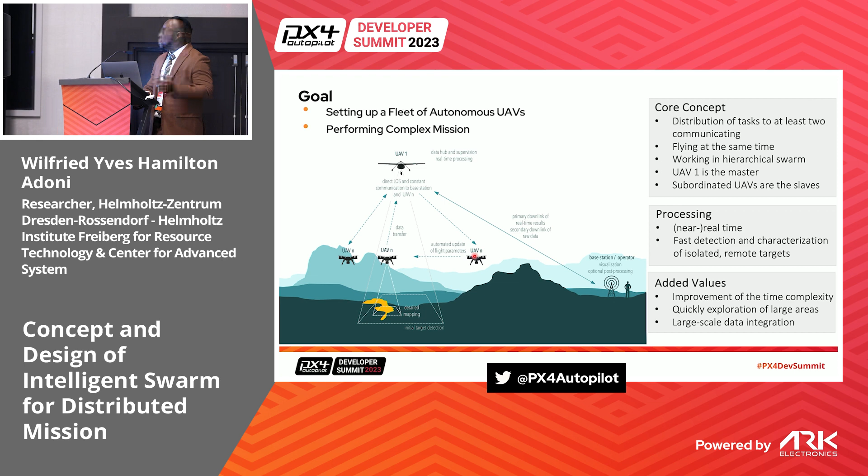So this is a simple example that highlights the impact of the swarming concept. We make that here. An example of the survey mission that we will use to survey an area of 1 kilometer square for hyperspectral imaging processing. By using the conventional approach with a single swarm of drones, we achieved this mission in 2 days.

And don't forget that every time we have to make some little downtime to change and recharge the drone batteries. So in this case, we can say that this approach is not very good, because it takes more time, and the computation is made sequentially until we cover the whole area.

So when we use the swarming concept, and we use a fleet of worker drones which work together to achieve a common mission, we achieve this mission in 2 hours. So from 2 days, we switch to 2 hours. And the drones fly simultaneously, and we can acquire lots of data sets in real time. So this approach is very interesting, because by using this concept, we can explore some big area in record time.

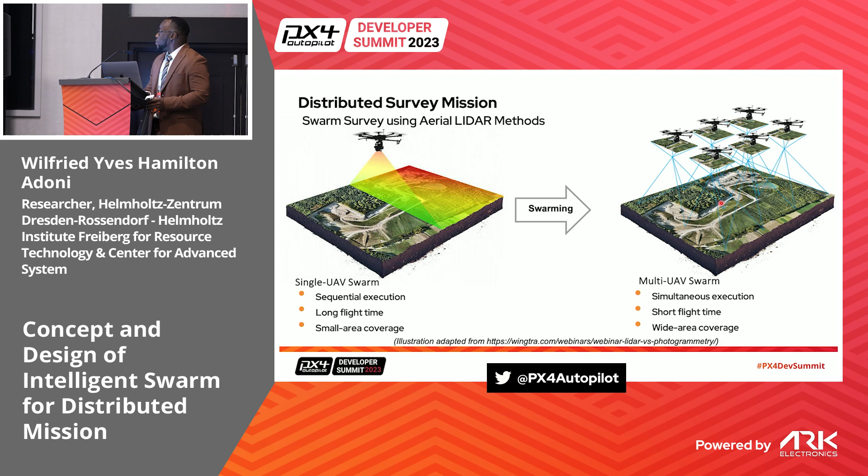But we have a lot of challenges and constraints that we have to face when we work on the concept of autonomous swarming. The first one is about the technical barrier. Don't forget that the drones we have currently have limited flight time, because the battery life cycle is too short, and every time we have to change and recharge the battery. This affects the timing. Another one is about the interoperability.

Since in the swarm we can have different kinds of drones with different kinds of communication protocols, the question is how to create a mesh communication protocol, and let the drones communicate if they have different communication protocols.

And we have also the problem of mobility. In the swarm, sometimes when one drone moves too far away from another one, we can lose the communication. So we have to maintain a certain distance that prevents the network instability.

And another challenge is about the embedded intelligence. By intelligence, we talk about how the drone reacts, how the drone collaborates, and how the drone coordinates some jobs or tasks with another drone to achieve the common mission.

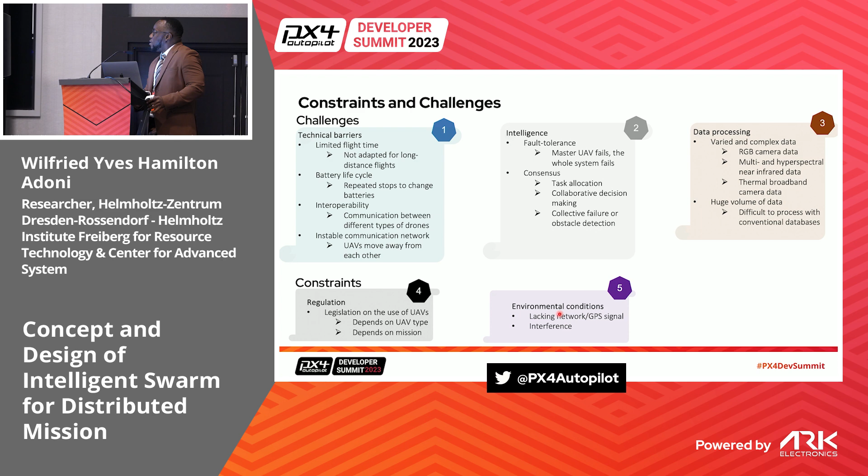And we have another constraint related to the weather and the environment conditions, which can affect the network stability and the GPS signal.

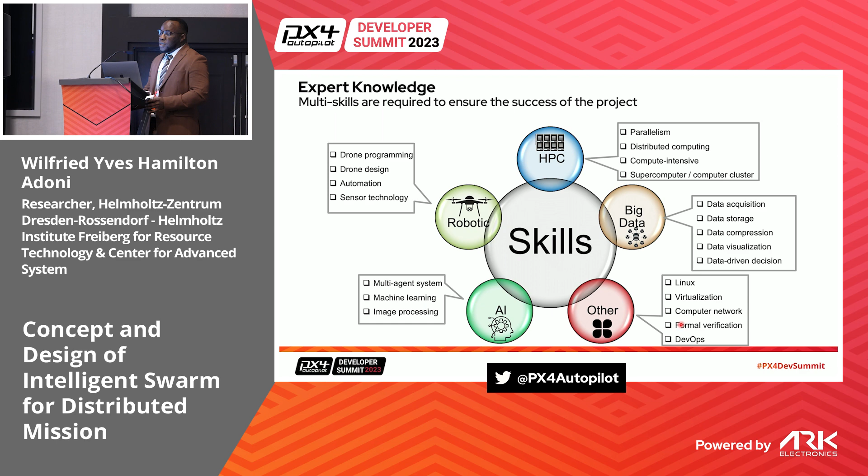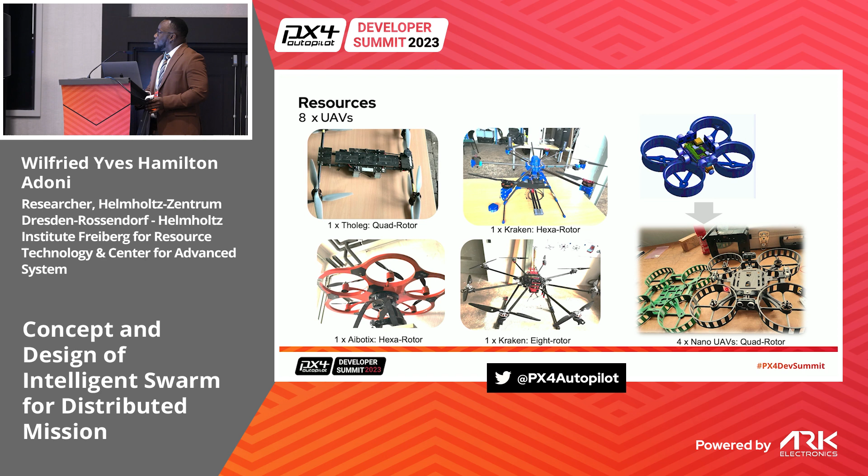So, with our research institute, we have 8 drones, and most of them are multi-rotor. For the moment, I perform some tests with the nano drones. It's 4 drones. I use one as a master, and the other 3 serve as workers. And when I'm sure about the test, I'll deploy this on the big drones.

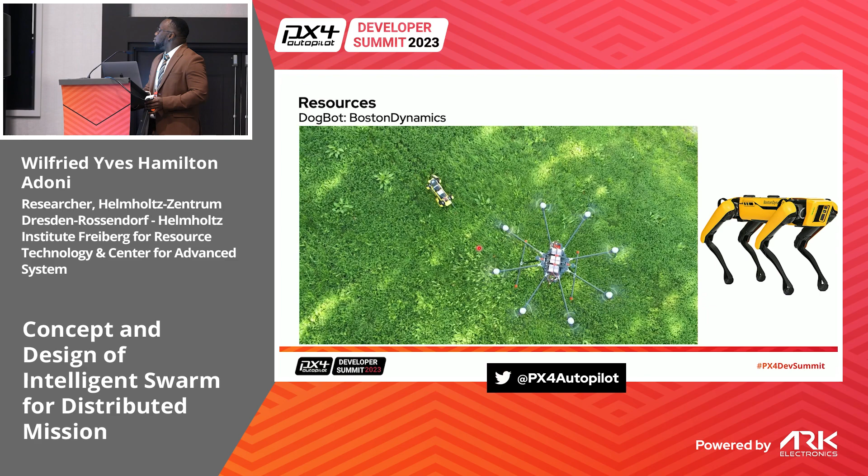And we also want to build a coordinated ground-to-air program, which will allow us to have full coordination from the ground to the air between a given drone. So we plan to add the dogbot inside our swarm to perform some other collaborations. And this is one example of our last implementation.

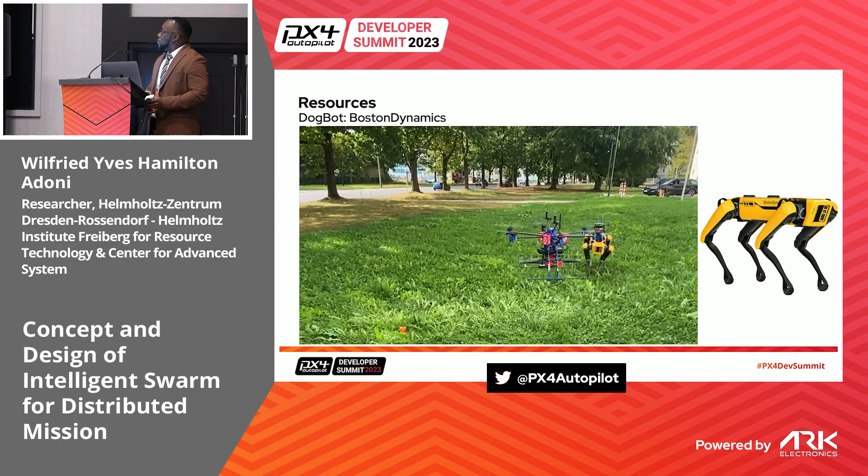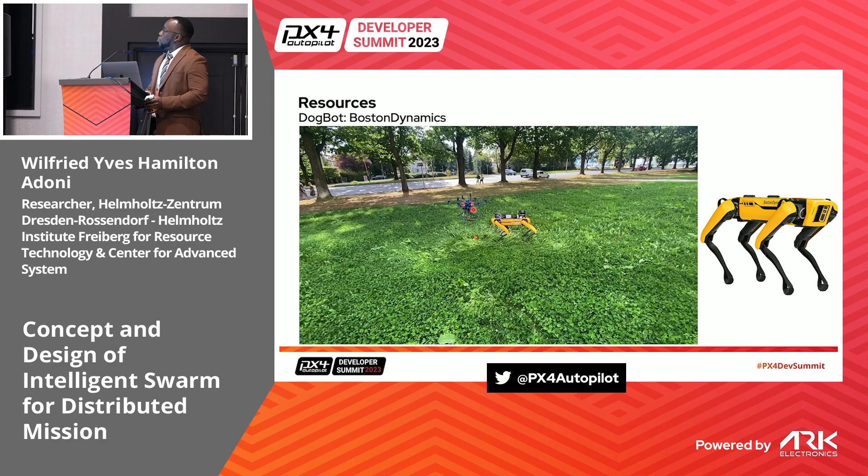First, the big drone will fly at a given altitude. It will search for a target, and it will send this position to the dogbot, and the dogbot will move to this target. It will identify the target, and from the identification, it will tell the drones, okay, now I have some information about the target. Come here, pick up the target and move to another position.

So this is another project that we plan to work on, and we will integrate the dogbot in the swarm. There is not a big difference, except that for the dogbot we don't have to consider the Z position, because for the drone it's about X, Y, Z, and for the dogbot it will be just X and Y.

For the software tools, we opt most of the time for open tools. We use ROS as a programming framework, and we use the standard MAVLink protocols. And here we use Ubuntu 20.04 for the implementation of the program, and the Raspberry Pi is the operating system of our drone.

And before deploying on the real drone, we perform some simulation. For that, we use Gazebo 11 with RViz to have some information about the perception of each drone. And sometimes we use MAVProxy, which is a light version of a ground station.

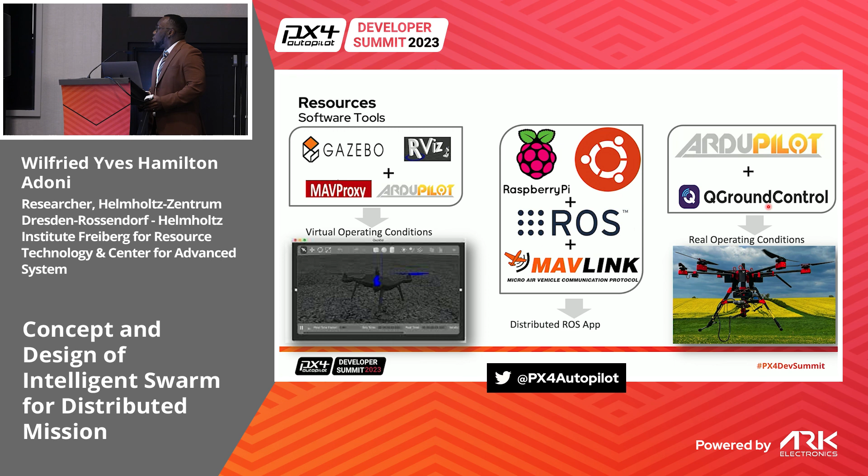So, okay, before we go to the conception, it's very important to understand some information about the communication architecture and the communication protocol, because it's very different from the classical drone concept that we use. The first thing we need to understand about the swarming concept is that we have a set of drones which work together to achieve a certain mission, and we have some interaction.

The first one in the architecture is that we have a fleet of drones. It could be autonomous or not autonomous. So when is it an autonomous drone? It's about the drone that does not need human assistance. For not autonomous, it's about the drone that is remotely controlled by a human from the ground. And the set of drones will form the multi-UAV, also called a swarm.

And we have the environment. So in the swarming concept, the definition of the environment is very important because each drone, based on the local environment that it has, will perform some action in this local environment. And we have perception. The perception is about the information that the drone will collect from the embedded sensors that we have.

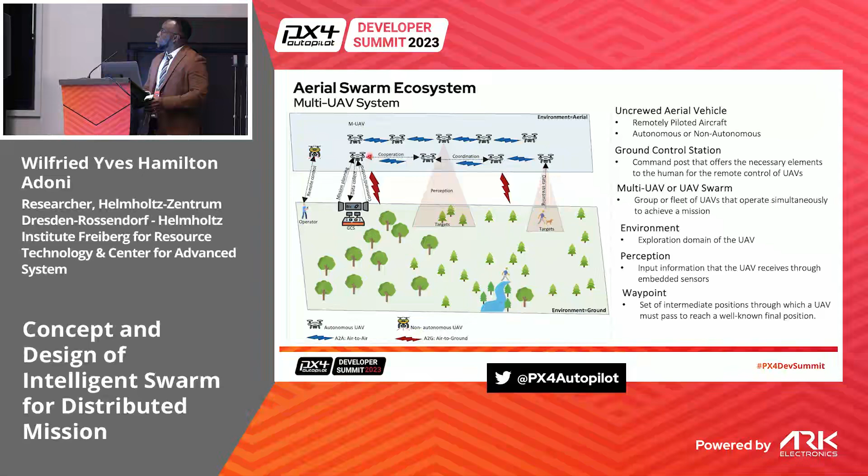And we have different types of drones, and this is also important because the kind of drone that we have in the swarm will determine if it is a homogeneous swarm or a heterogeneous swarm. A homogeneous swarm is when all drones in the swarm have the same configuration. A heterogeneous swarm is when in the swarm we have different kinds of drones.

So we have four kinds of drones. The first one is the helicopter drone. It contains a single rotor. This kind of drone has limited mobility because it just has a single rotor. But it has other advantages, like the flight time, and it can hold the same position for a certain time. We have the multi-rotor, which is an improved version of the single rotor, except that this drone has a limited flight time because of the battery life cycle.

We have the fixed wing. It is another version of drone that uses a fixed wing attached to the structure of the drone, and it flies for a long time and has a high velocity. But the problem is that it cannot hold the same position for a long time. The last one is the hybrid drone. It takes advantage of the multi-rotor and the fixed wing to face some challenges, some problems that we have here.

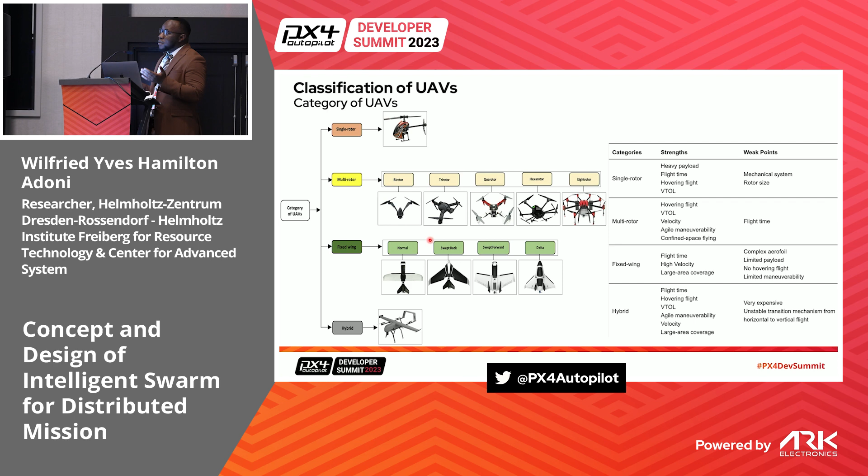So when we build a swarm, it's very important to understand what kind of drone we have, because it will really affect the mobility of the swarm. It sometimes affects the mission planning, because if we have one drone with a limited flight time and another one with a long flight time, we have to be careful about the workload of the drones.

For the communication architecture, we have different kinds of communication architecture. Here I have made a classification. The first one is a centralized communication architecture, and we have a decentralized communication architecture. From the decentralized one, we have a single-group architecture, and another one, the multi-group, which is an extended version of the single group. And don't forget that the communication architecture of drones belongs to a flying ad hoc network, dedicated to mobile objects, which belongs to a MANET.

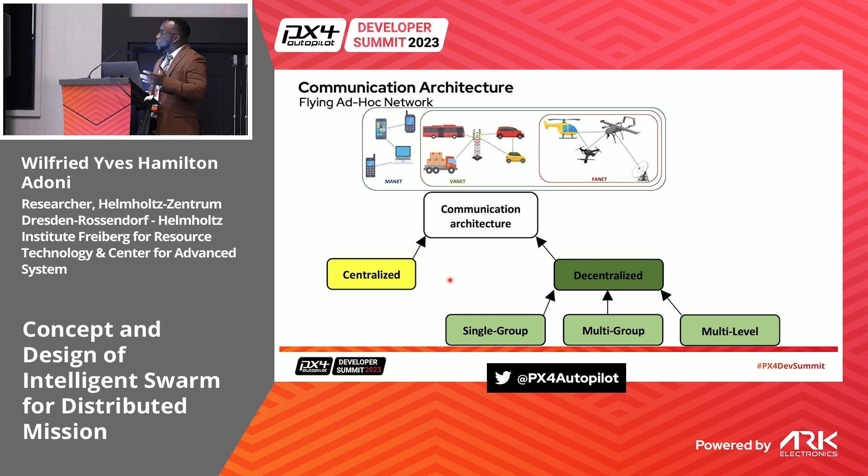So if we want to build a whole autonomous system which embeds all kinds of vehicles, it's very important to understand the communication protocol that we have between the FANET and the MANET. And if we want to switch from the aerial vehicle to the mobile vehicle, we have to cross the protocol to allow easy communication. So I will now explain the different kinds of communication architecture, because with this communication architecture we will implement the kind of mission that we have.

The first one is the centralized communication architecture. With the centralized communication architecture, all drones communicate directly with the QGroundControl station, and we don't have direct communication from drone to drone. All communication between two drones must pass through QGroundControl. This is another problem, because if we are connected to the QGroundControl station, we are not allowed to move too far from it, because we lose the communication. So in this case, we can see that this kind of architecture has some weak points. The first one is about the coverage space.

We use this sometimes to cover a limited environment because we are not allowed to go too far from the ground control station, because we will lose the communication. Another problem is interoperability. For this, all drones in this kind of architecture must have the same protocol to enable communications. And another one is the single point of failure. If the QGroundControl is down, we will lose the communication with the whole system.

This is why we switch here to the decentralized version. The decentralized version is an extension of the centralized communication form. We have to remove the QGroundControl dependencies. With the decentralized version, the first one is the single group. In single group communications, we have three kinds of actors. The first one is the QGround. We have another drone called the gateway drone. And we have the rest of the drones in the swarm. All communication between QGroundControl and the rest of the swarm passes through the gateway drone. It will relay the information from the QGround and dispatch it to the rest of the drones.

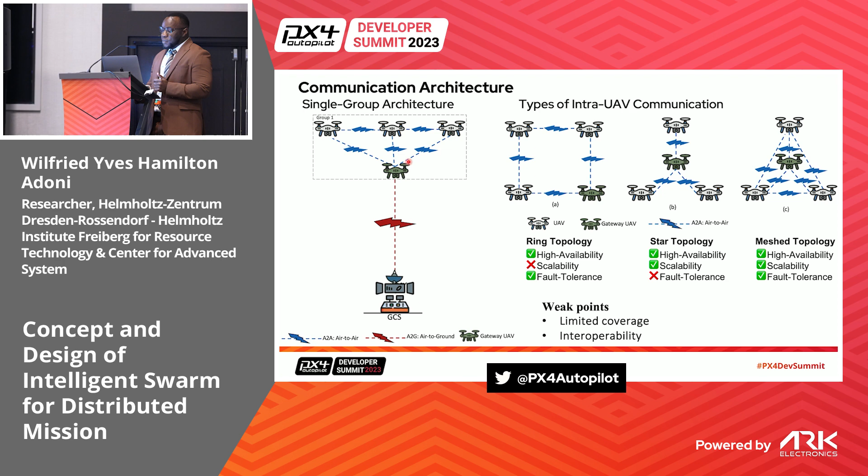The last one, the best I think, is the mesh topology. It takes advantage of the two proposals: it combines availability, addresses fault tolerance, and allows adding any drone to the swarm easily. But it has some weak points: with this communication architecture, we cannot move too far from another drone because we will lose the communication. This is why this architecture is used for limited coverage. We also have a problem of interoperability. All drones inside the swarm must share the same protocols.

Another communication protocol is an extended version from single group to multi-group. It's a little bit different. We build a set of different groups, and in each group we have a gateway that will relay information between all the drones in the same group. Communication between two different groups of drones passes through the ground control station. It presents a single point of failure in the ground control station first, because if the ground control station is off, we will lose all communication with the swarm. And if one gateway in a given group is off, we will lose the communication inside that group.

The last one is the multi-level architecture. It is, for the moment, the best communication architecture that we have for swarming. With this architecture, we don't have a single point of failure, and we can use different kinds of drones to perform the swarming concept. It consists of three layers. The first layer involves communication between drones. The second involves communication between groups of drones. And the last involves communication between the group of drones and the ground control station. For this, we use the group of drones that is very close to the ground control station, which will replicate the communication to another one.

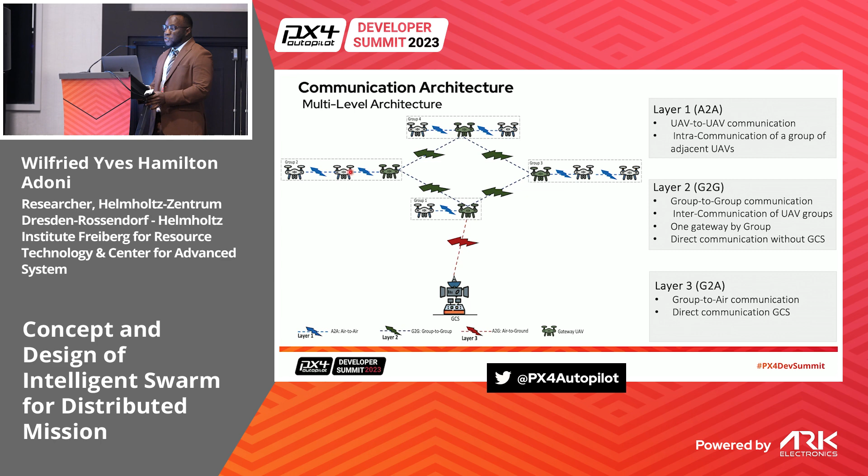So now we will start with the concept and design. I will show you the concept and design of the swarming that we have been performing with my research institute. First of all, the proposed concept is based on different kinds of methodology for the communication. To address the problem of communication, we use a decentralized communication architecture. And so, why? Because it allows us to eliminate the dependencies from the ground control station.

And we want to build fully autonomous drones, a fully autonomous swarm that will perform some actions without human assistance. And why did we opt for the decentralized architecture? Because with this approach, we can extend to different kinds of communication architecture depending on the kind of mission and the purpose that we want to have. And for the self-organization of the swarm, we opt for the leader-follower pattern.

The leader-follower pattern means that in the swarm, we have one drone that will serve as the master, and the drones in the rest of the swarm will serve as workers. The master drone is the main coordinator. It coordinates the actions in the swarm, it sends the mission, and sometimes it receives information about the progress of the mission inside the swarm. While the worker will work as a pure worker that will execute the tasks received from the master.

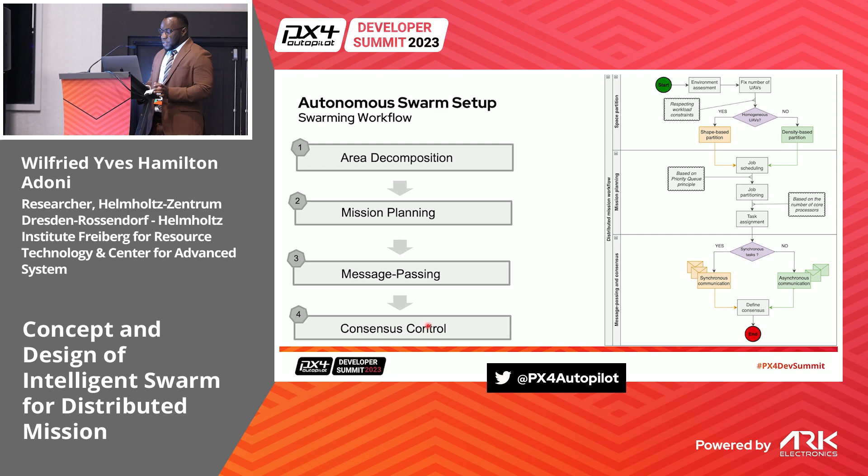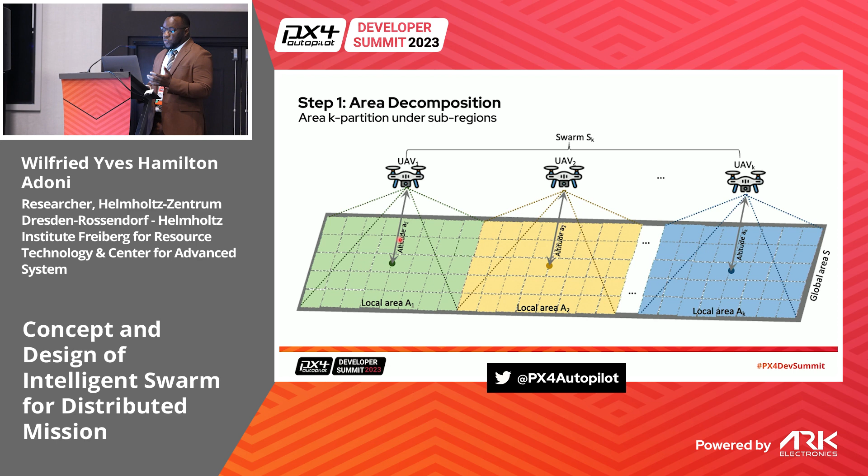The area partitioning is about splitting the area into sub-areas, and we assign each sub-region to one drone. And we have to create a boundary to avoid collisions, because we have to collaborate on coordination when we move to the boundary of the sub-region. And don't forget also that sometimes it depends on the altitude that we have in the swarm. If the drone has a high altitude, sometimes it affects the partitioning, or sometimes it affects the area of each sub-region.

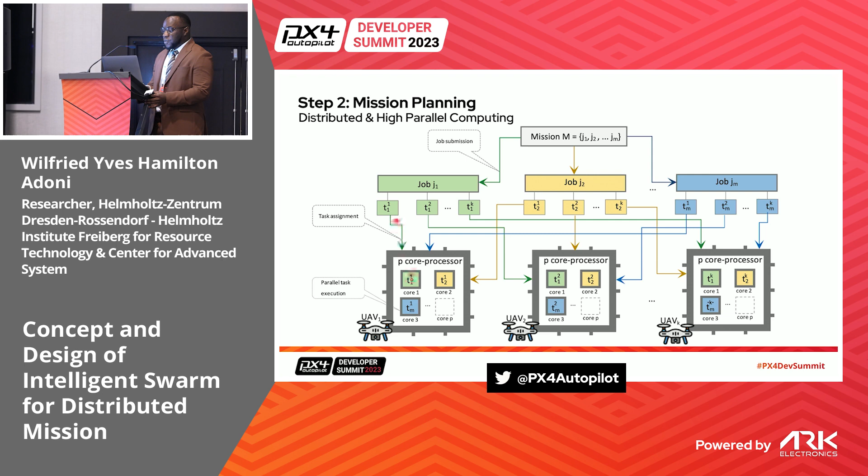The second step is about the distribution of the tasks. We consider that a mission is a set of jobs, and we take the job, we split the job into tasks, and we allocate each processor in each drone to compute the tasks that it receives. In this manner, it allows us to reduce the time complexity of the mission by the number of drones that we have. And to perform this action, we want to be sure that we have some available core processors. In our case, we use one core processor for one task that will be executed by one drone.

And concerning the message passing, we have two kinds of message passing pattern. The first one is about the synchronous communication message pattern, and the second one is for asynchronous communications. So it depends on the kind of mission that we have. If your mission involves real-time reaction between the drones, we opt for synchronous communications. Or if it is a mission where we don't have real-time interaction between the drones, or sometimes we have to wait until another drone achieves its task before going away, we will opt for the asynchronous time delay.

With the synchronous communications, all drones must publish and subscribe to the topics and services at the same time. While for the asynchronous time delay, we split the communication time into different rounds. And in each round, only one drone is allowed to publish and subscribe to a given topic or service. And we repeat the same process until we reach all the drones.

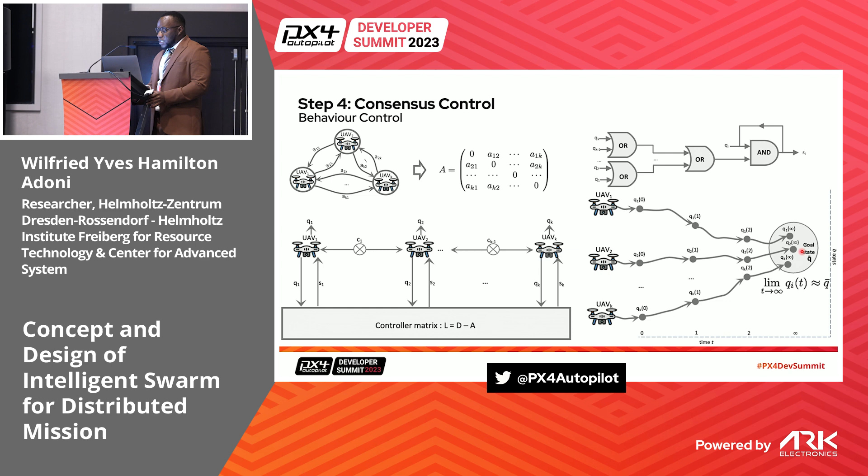So now for the proposed architecture, we have here a multi-layer architecture, and we can extend this by adding other layers. For the moment, it is a two-layer architecture. The first one is based on ArduPilot, and in this architecture we have two different sub-layers. The first layer is for the logical implementations. It contains some services and commands that we need to embed swarm programs. And before performing tests on real drones, we have a sub-layer that we use for the simulation.

And the second layer is the distributed computation layer. This layer is used especially to compute the distributed mission inside the swarm. It's based on ROS, and the communication architecture is a single group communication architecture. We have here the whole drones connected to a single leader drone that will serve as a gateway which will relay information between the application layer and the distributed computations.

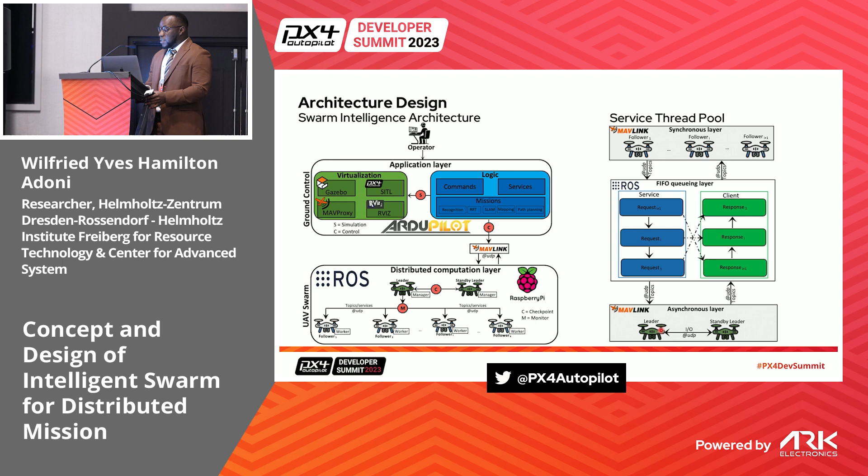The communication service between the follower drones is performed in synchronous manner, so that we have real-time interaction and can share resources or coordinate actions in real time. While for the leader drones, it is done in asynchronous manner, because we don't need to communicate every time with the standby leader. The standby leader receives information on demand of the leaders, if he asks it to send some information about its health status, etc.

So now, how do we control the swarm consensus? To control the swarm consensus, we use three kinds of daemons. The first daemon is the swarm manager. It is located on the leader, and it consists of two components.

The first one is the mission planner component, and its role is just to plan the distributed mission. By planning the distributed mission, it means that it shares the tasks to different ROS cores inside the follower drones. And we have the mission manager component.

This is used to perform tracking tasks about the advancement of the missions, and is also used to receive information about the health status of the worker drones. At the same time, it performs checkpoints about the advancement of the mission and the status of the main drones, and sends this information to the standby leaders.

We have a drone manager daemon. This daemon is located on the follower drones, and it also consists of two components. The first one is the task manager, which is used to assign each task received from the master drone to the ROS core.

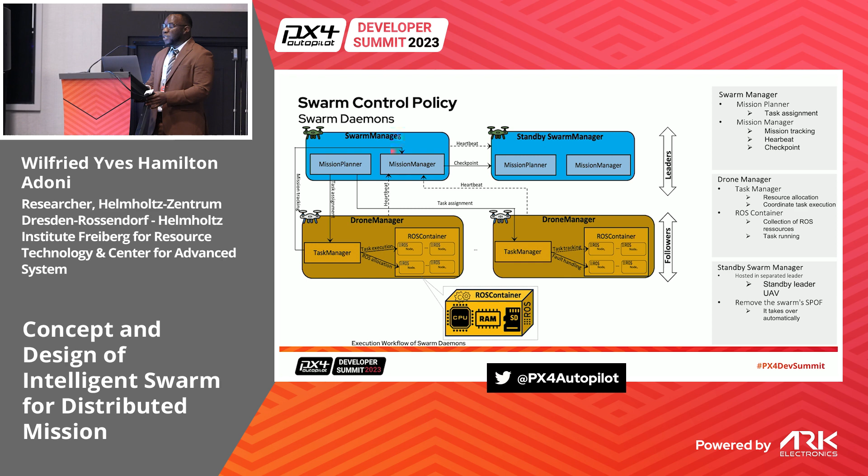So here is the communication process between the leader drone and the standby leader, how the two drones communicate to coordinate and to face the problem of fault tolerance. Fault tolerance means that if in the system the main drone is off, we must continue to perform the activities.

So for the first one, the leader drone will recurrently submit a heartbeat to the standby leader to notify that it is always working. It also submits a health status about the level of the batteries and other information that will be useful to determine if this drone could also use the main leader role.

At the same time, it performs a checkpoint. The checkpoint is very important for the continuity of the activity, because if this drone fails, the second drone will access the checkpoint file, and based on the information stored there, it will continue the activities without requiring information from the main drone.

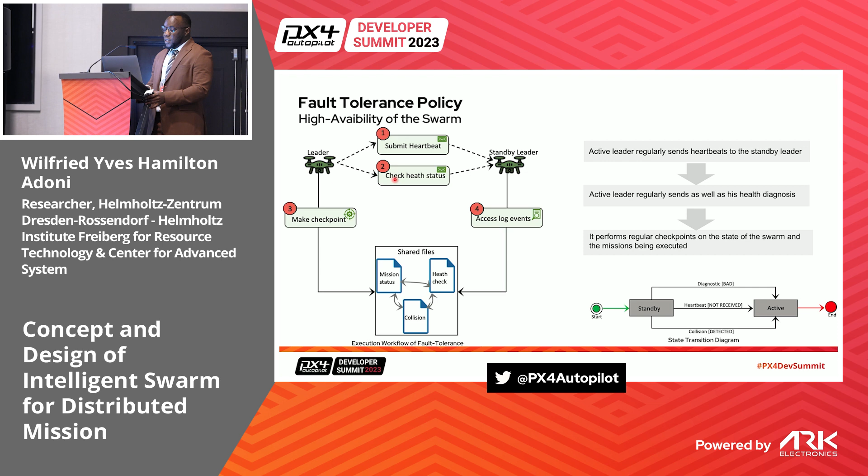So we switch from standby to active when the standby leader detects a bad diagnostic from the main leader, or sometimes when it does not receive a heartbeat from the main leader, or if we detect a collision from the leaders in the shared file. It will automatically pass from standby to active mode to achieve business continuity of the swarm mission.

Here is how we schedule jobs failed from a drone that breaks down. To perform this action, we use the FIFO and priority classifier. By FIFO, it means the first drone which fails will be the first drone whose task we will plan.

We have a priority order because, by the swarming concept, we have different kinds of jobs that we perform at the same time. So we have to give a different priority to each kind of drone. We have three kinds of priority.

The first one is the highest priority. It contains tasks that are very useful for swarm management. And we have a middle priority.

Sometimes middle priority is a job that is not necessary - we don't necessarily need it for the advancement of the missions. The last one is optional jobs, such as collision avoidance jobs, etc.

For the environment, we built a dedicated integrated environment that is used easily to implement a swarm project. The first one, we have the Gazebo directory.

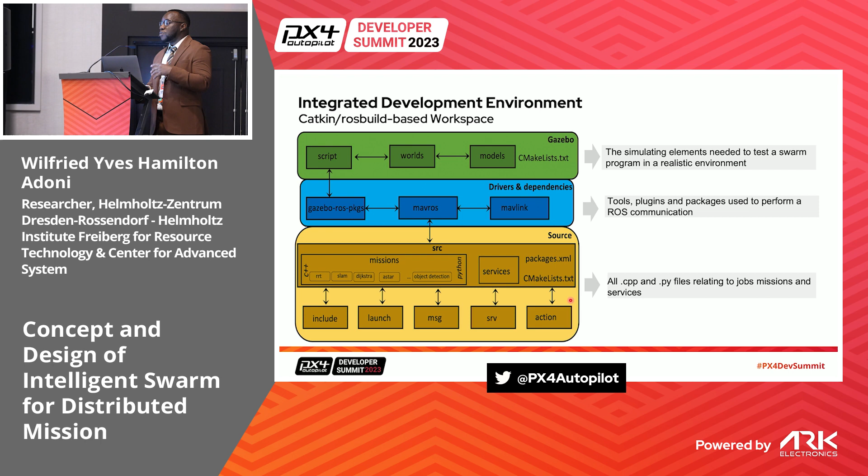This is very important because with the current workspace, it's very difficult every time to build a swarm concept. We have to go into various directories or files to rechange things, and it takes more time.

So now we'll go on to the experimental tests. For the moment, we have different kinds of tests.

We have a test for SLAM, and we have two kinds of SLAM: visual SLAM and SLAM with LiDAR. We also use this for the RRT algorithm to explore unknown environments using the concept of swarming.

We also use this for point cloud generation for large environments, and for multi-target detection. This means that based on a given area, we split the area into sub-regions, and one drone will work on its sub-area to detect different kinds of targets.

And we have a distributed coverage path planning algorithm, for which I will show some experimental tests.

For the experimental test, we use a 5 UAV swarm. We use one as a leader, and the other four serve as followers. Each drone is equipped with 2 batteries, and the perception of each drone is about 2 meters square, flying at a 5 meter altitude.

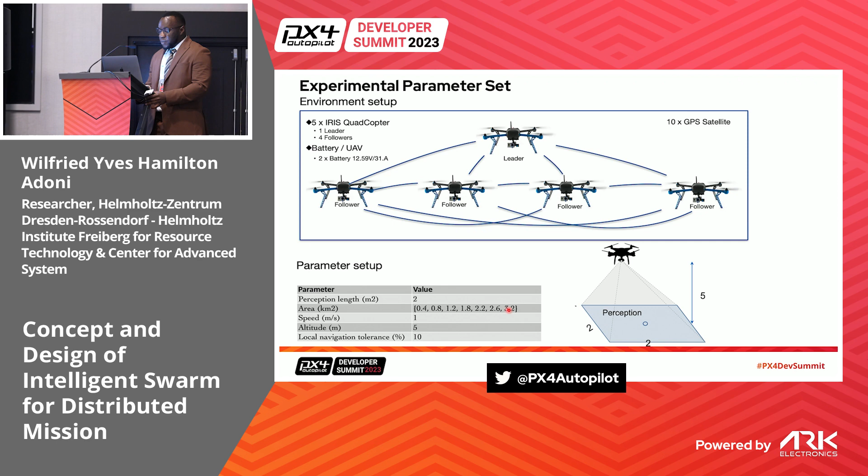The first experimental test is about a single UAV swarm. In this test, only one drone will play both the role of master and follower at the same time.

In the next slide we will distribute this task. The main objective is to distribute these tasks across different drones. For now, this drone plays both the role of master and follower - it coordinates its own actions and always sends commands to itself to perform actions.

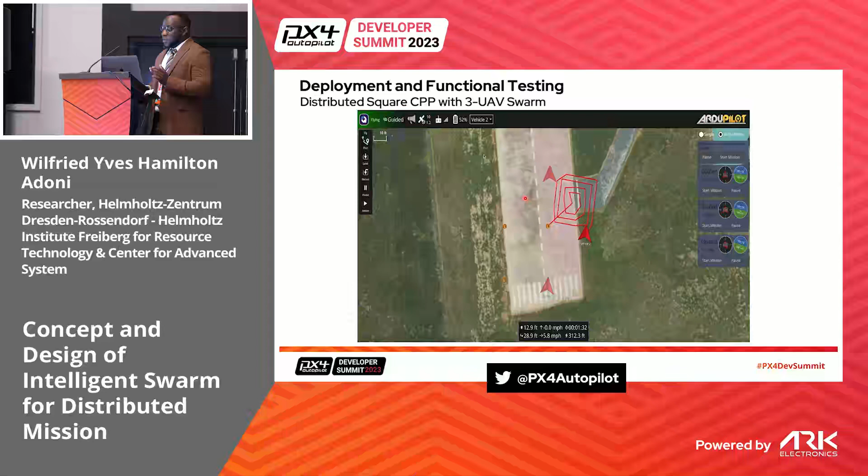Here we detect a collision. The drone stops slowly and anticipates the next position to avoid the collision, because it has information about the next waypoint of the adjacent drone.

This is a coordinated motion planning approach that we use for swarming - a 3 UAV swarm which works together to achieve a given mission. This highlights the importance of message passing.

Each drone, before moving, sends its next position to the adjacent drone, and that drone uses this to anticipate and avoid collisions. This communication is performed in a synchronous manner so we have real-time interaction, but we could also implement asynchronous communication if the mission does not require real-time information.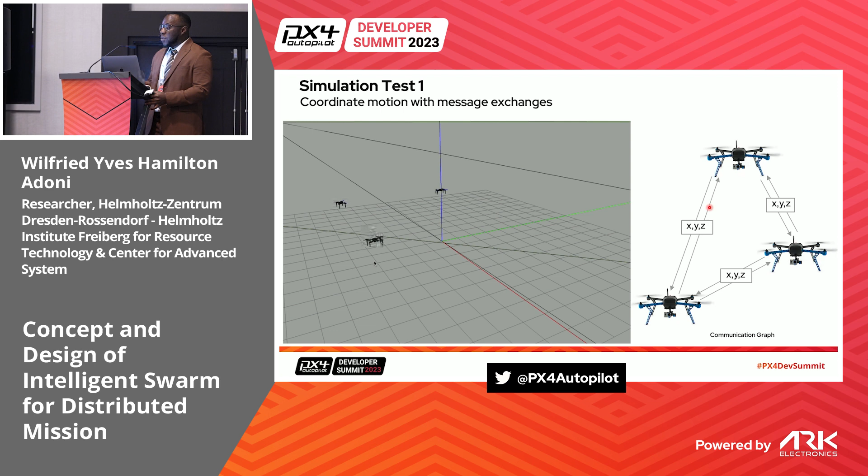For the moment we have implemented around 12 distributed coverage path planning algorithms, and it works very well - the time complexity is reduced from exponential to linear.

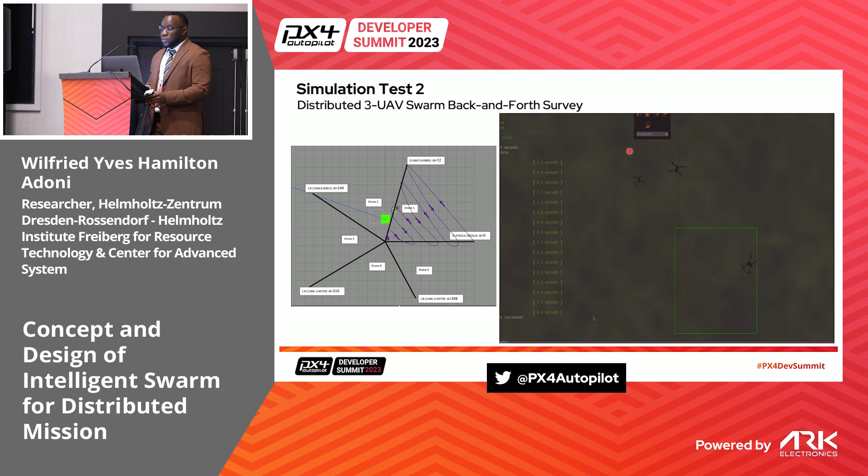Here we make them move slowly to avoid collisions. The collision avoidance depends on the consensus control we implement - it's a user-defined logic, depending on what kind of logic you want to implement to avoid collisions.

This is another experimental test we performed for this paper. The author proposed the LMAT algorithm, a coverage path algorithm used for survey missions, dedicated to drones with less battery.

When we apply the classical approach proposed by this author, we perform the swarming in 22 minutes. The drone starts there and moves - every time it moves to the next point, it has to accelerate and decelerate until it reaches the final position, or until the area is completely covered.

With our concept, we split the environment into sub-regions and assign each one to a drone. When we launch, we make the time complexity decrease to 6 minutes. Here, every adjacent drone shares a waypoint - it's very important to share the boundary waypoint because it allows us to avoid collisions and coordinate the motion of the drones in that area.

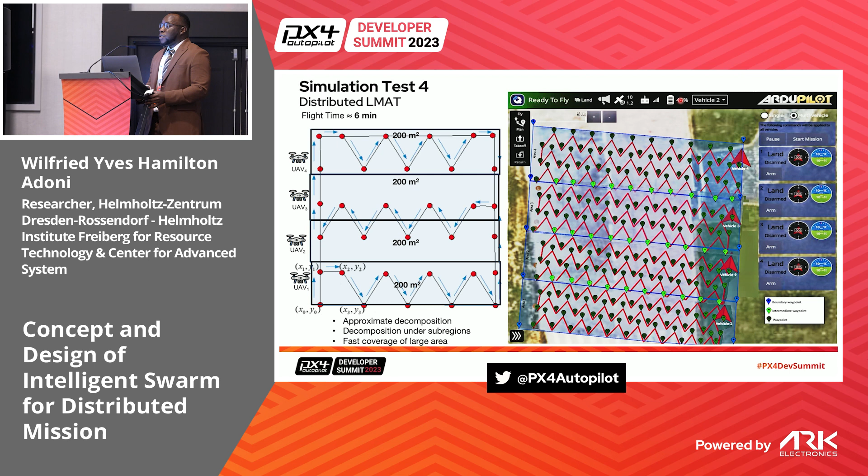We also note that here we use less battery - at the end of the flying time, we use just 0.5% of the battery. But for the first approach, we finished with 0% battery for the two drones.

So for the time complexity, we observe that when we use the conventional approach with a single drone, the time complexity regarding the area that we cover increases from linear to exponential complexity. By using the concept of swarming, it allows us to reduce the time complexity significantly until we reach linearity. So every time we add a new drone, it improves the time complexity.

And we also observe that here we don't have a big difference, because it's just a little area. It's around 400 square meters. So we don't have to use 4 drones to survey 400 square meters. We can say that the swarming concept has a good result when we work in a large area.

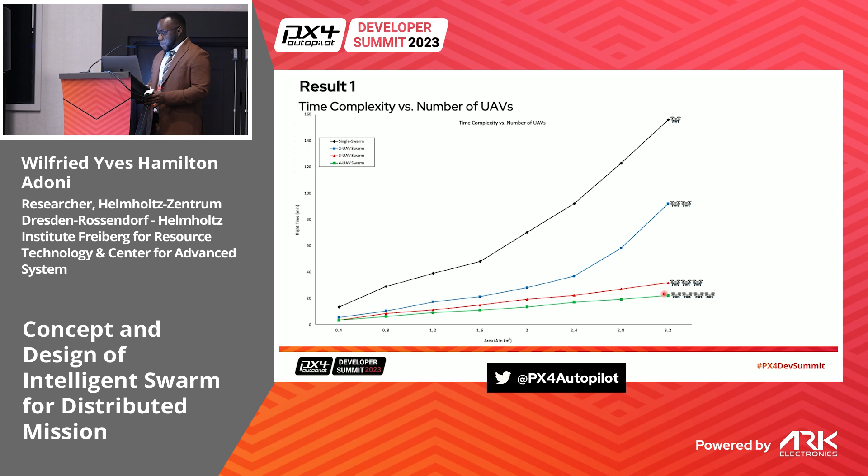For the power consumption, we also observe that the swarming concept allows us to reduce the power consumption significantly. First, this graph represents the power consumption with a swarm composed of just one drone. With just one drone, we start around 200%, and we finish with 0% of the battery level.

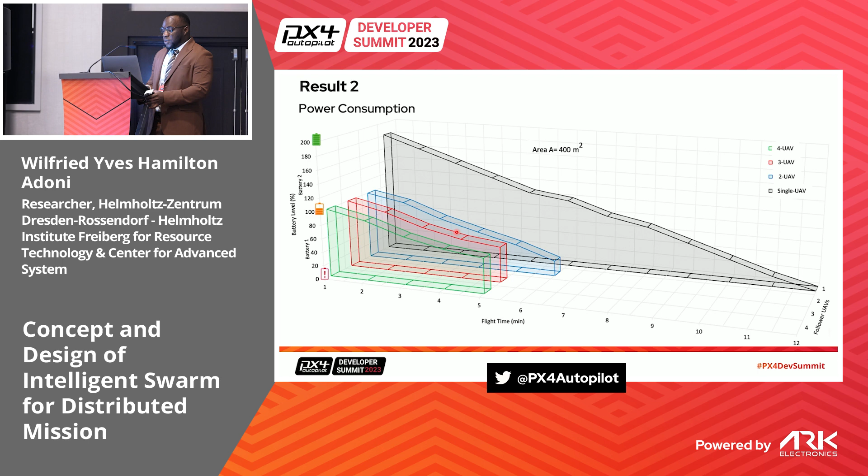When we switch to 2 drones in the swarm, we just use the battery level from 1 battery. We only have to consume the battery level from 1 battery. And it's very important because it allows us to save more energy when we plan for the swarming. And for long distance, it's almost the same.

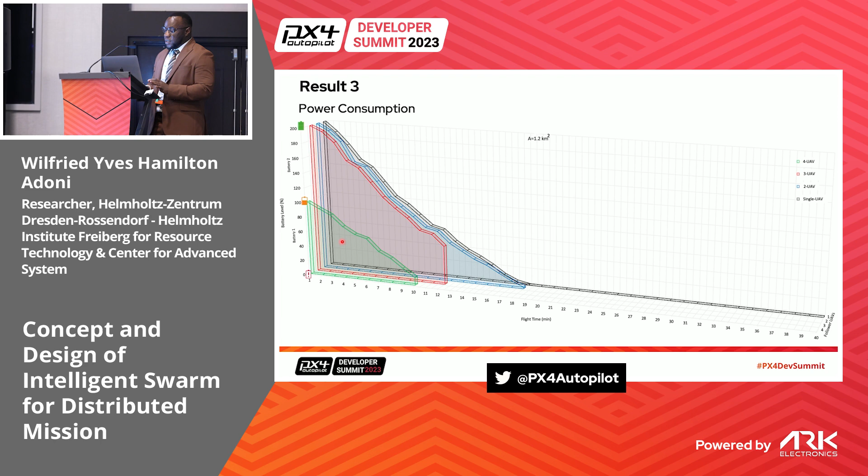We observe that for long distance, we cannot achieve the mission with just a single drone because we'll consume the whole battery. But if we move to the swarming concept, it allows us to save some batteries because the task is distributed inside the swarm.

Another one is about the network bandwidth. If we opt for the swarming concept, it also decreases the network bandwidth by the number of UAVs that we add in the swarm. Here the network bandwidth is reduced because the task is distributed inside the swarm, and we don't always have to communicate with just one drone, because lots of communication with one component will involve more network bandwidth.

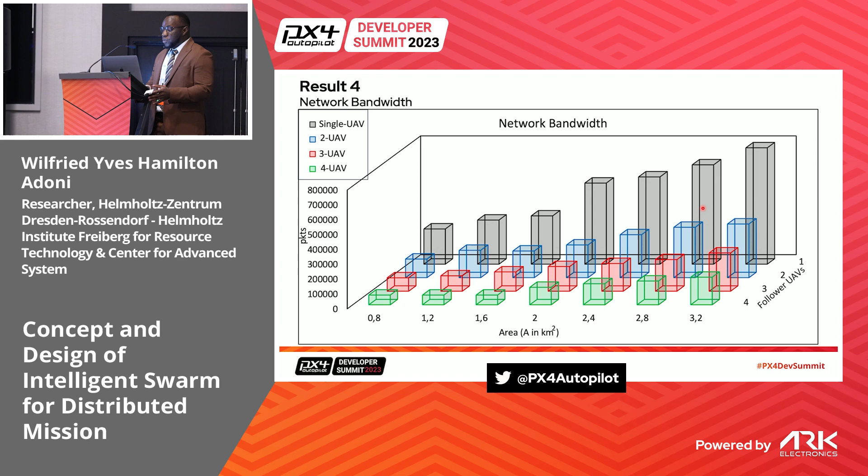And for the network latencies, we observe that based on the proposed message passing pattern, in the two cases, we have 0 packets lost. And the time delay is between 20 milliseconds and 70 milliseconds. So if we evaluate against the literature review, it is a very good result because the time delay is within the range of acceptability. If the time delay is bigger than 100 milliseconds, it is not good.

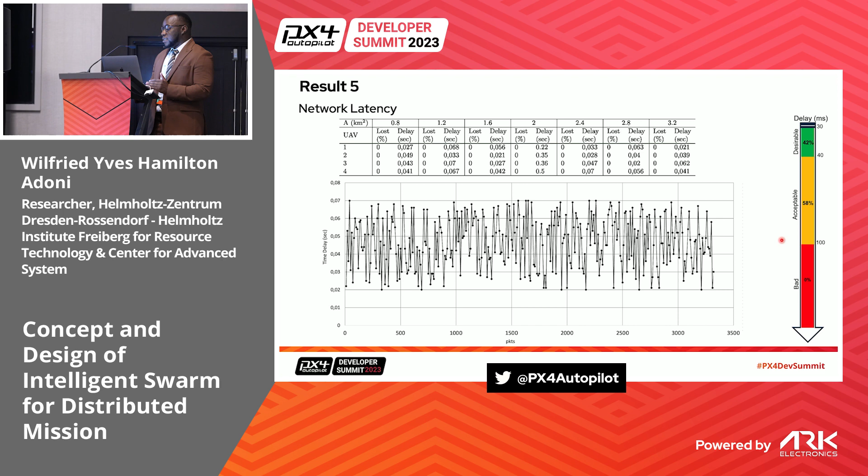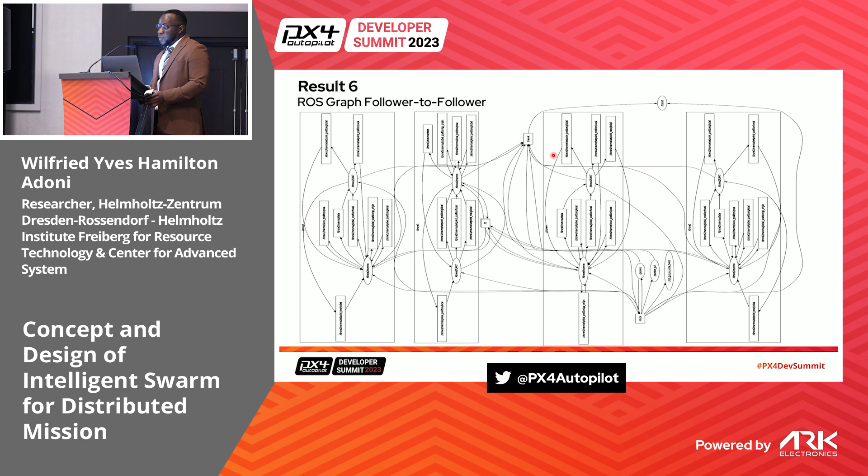This is very important because it shows that the system is highly available, and in terms of fault tolerance, if this drone is not accessible, we can continue with another resource from other drones.

So for more information about the concept of swarming, we have one publication in the MDPI journals. I suggest you read this paper. You will find more detailed information about the concept of swarming. We also discussed the architecture, the challenges that we have, and how to understand the distributed tasks in the swarm concept.

So for our team, we work together on both the software part and the hardware part, but my concern is the programming of the swarm concept. I'm working on the dedicated API for ROS. It will be a distributed version of ROS. It contains some APIs that allow us to implement some sample missions. In the future, we plan to add other functionality to improve the API that we have.